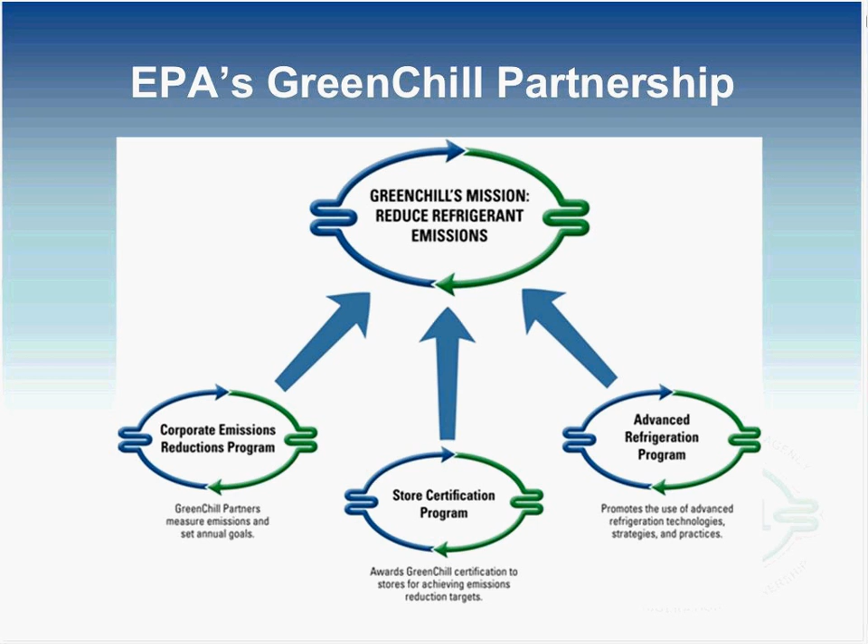What I'll be talking to you about today is the GreenChill leak reduction guide that we're putting together to help reduce refrigerant loss in supermarkets and to try to reduce and prevent leaks and repair them on a rapid basis. It's a guide that's going to be coming out shortly. It's not a cookie-cutter solution for any of the stores. We're going to cover everything on a broad basis.

Supermarket refrigerant leaks in a typical store now average 20 to 25%. GreenChill members have been able to reduce that leak rate in half, down to about 12.5%, and individual partners have been able to reduce it even further, down to under 8%. And partners with advanced refrigeration systems with best practices have been able to achieve rates on individual stores of 0 to 5%, which is remarkable.

The 8 categories that we picked that contribute to refrigerant leaks in supermarkets. Compressor racks are number 1 in most supermarkets, and these racks are generally purchased prefabricated from a major supermarket refrigeration manufacturer, and they have manifolds, receivers, valves, oil system, and controls factory installed to reduce field labor, and the hope is that it will also improve the installation quality. Leaks occur on the racks: a number of components and fittings located on a common frame within a confined space and subjected to the constant vibration from the compressors.

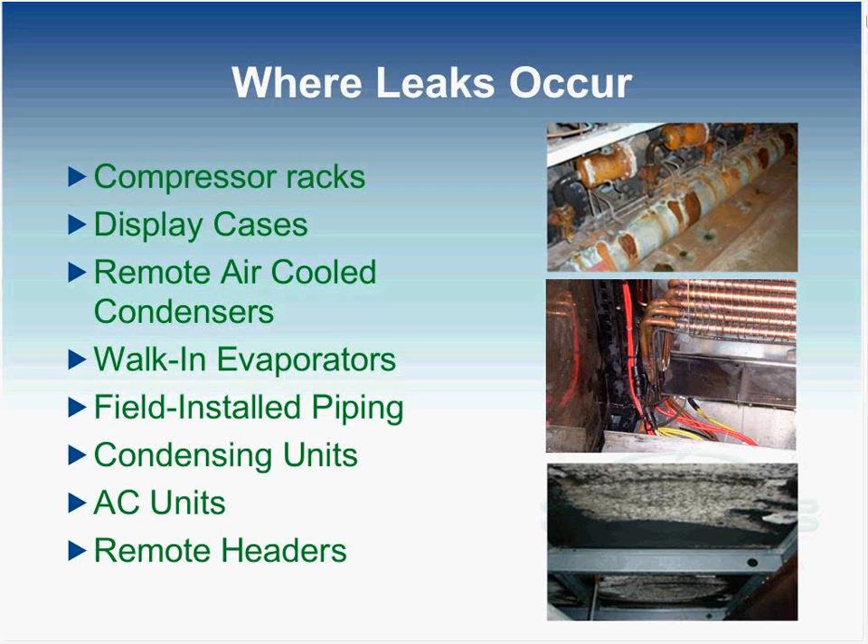Here are causes of leaks. Leaks occur in brazed joints from improper brazing techniques. This is due to improper cleaning of the joint prior to brazing, using the wrong brazing alloy, not heating the joint uniformly, or to the proper temperature, before filling it with brazing alloy. Leaks occur also on threaded and flared fittings when they're not tightened sufficiently, and of course they're also subject to loosening from vibration. At the other extreme, they also could crack as a result of being over-tightened.

Seals exposed to HCFC refrigerants swell at a different rate than seals exposed to HFC refrigerants, and if your system is being retrofitted from an HCFC to an HFC, the gaskets or seals in the system may need to be replaced.

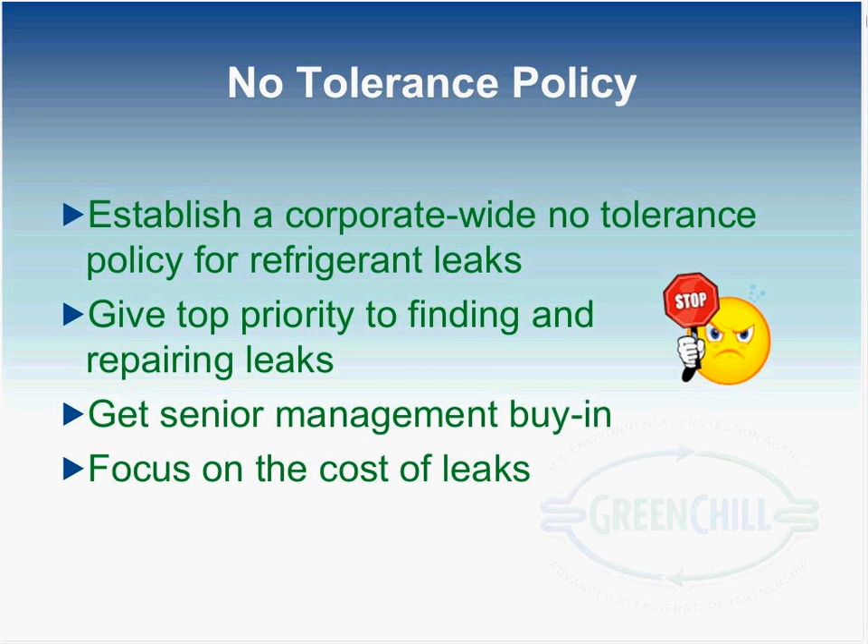Once the company has decided to make leak prevention a priority, the next step is to put a refrigerant management system in place in your stores and in your company. Leak tracking is an essential component of the refrigerant management system and of a program that you would have. Tracking systems enable companies to easily quantify leaks, isolate leak sources, and manage refrigerant leaks across multiple stores and systems. Refrigerant tracking also allows companies to benchmark their data against industry trends and set and meet reduction goals. Tracking systems enable companies to hold individual stores accountable for their leaks and make it possible to reward store employees, service technicians, or contractors for good practices.

While tracking systems can be useful, software-based systems are more efficient and proactive in tracking refrigerant leaks. Some programs currently available can track inventories, service dates, quantities, refrigerant types, system capacities, leak frequencies, and component failures. Software should be accessible by the service technician at store level, and each technician should be trained to input the information for every leak event, repair, refrigerant addition, or verification of the system. It should include the refrigeration system ID, the leak location, the type of failure, and the quantity and type of refrigerant added.

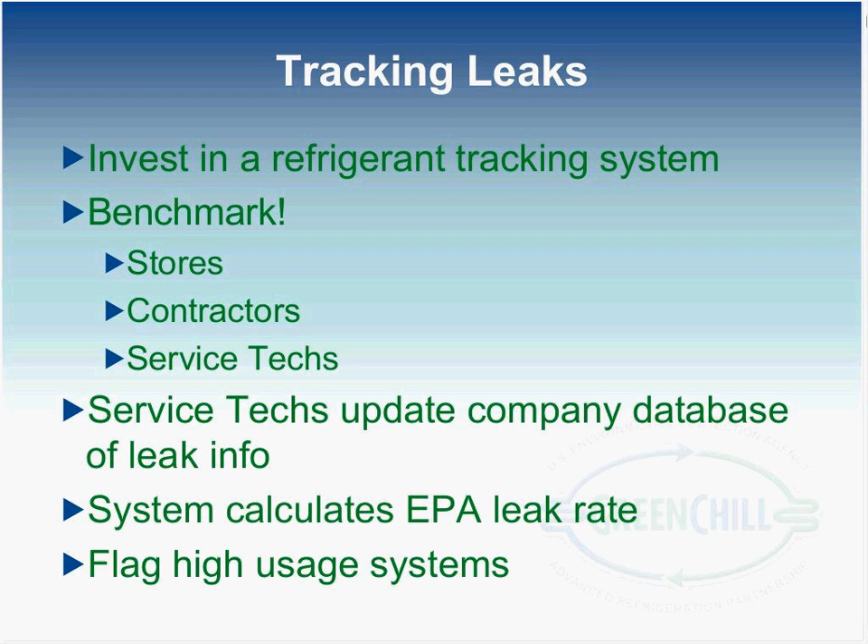Refrigeration racks, as well as the entire mechanical room, should be maintained to as clean a level as possible. Compressor racks and their components should be free of oil and dirt. Corrosion on steel components should be removed, and the components painted with a rust-inhibiting paint to prevent further corrosion. The room should not be permitted to be used as storage areas by store personnel.

Besides the obvious safety concerns, the clutter reduces the technician's productivity, adds to his frustration, and increases maintenance costs. As a result, equipment in mechanical rooms should be cleaned on an annual basis. Oils and other substantial messes should also be cleaned up as they occur.

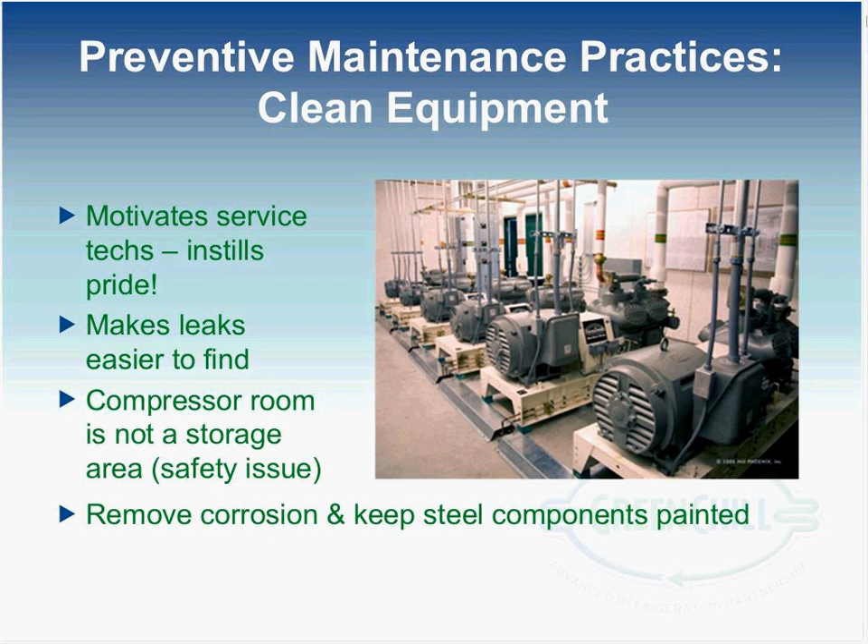Refrigerant leak monitoring and alarm systems allow us to respond to major leaks that could develop between regular leak inspections. Leak detection systems could be direct or indirect. A direct leak detection system measures the refrigerant leaking in an air sample near a refrigeration system or one of its components. An indirect system would measure changes in receiver refrigerant levels or the weight of the condenser receiver assembly, or a system temperature increase.

Often the first notification of a refrigerant leak in a store is a case temperature sensor that's creating a temperature alarm as the rack runs low on refrigerant. Based on that, you could actually create a low-cost alarm system that could be incorporated into most stores' energy management systems by using a temperature sensor that's located in the farthest system from the rack, which should be the one that would actually be affected by a low refrigerant charge.

The system could be programmed with an alarm temperature that's as close to set point as possible without incurring any nuisance alarms, and when this alarm's activated, it could be treated as a refrigerant leak alarm. The monitoring system you choose needs to be tied to an alarm system that proactively notifies store management of any leaks. A level of redundancy or checks into the alarm procedure should be in place to guarantee that the leaks are not ignored.

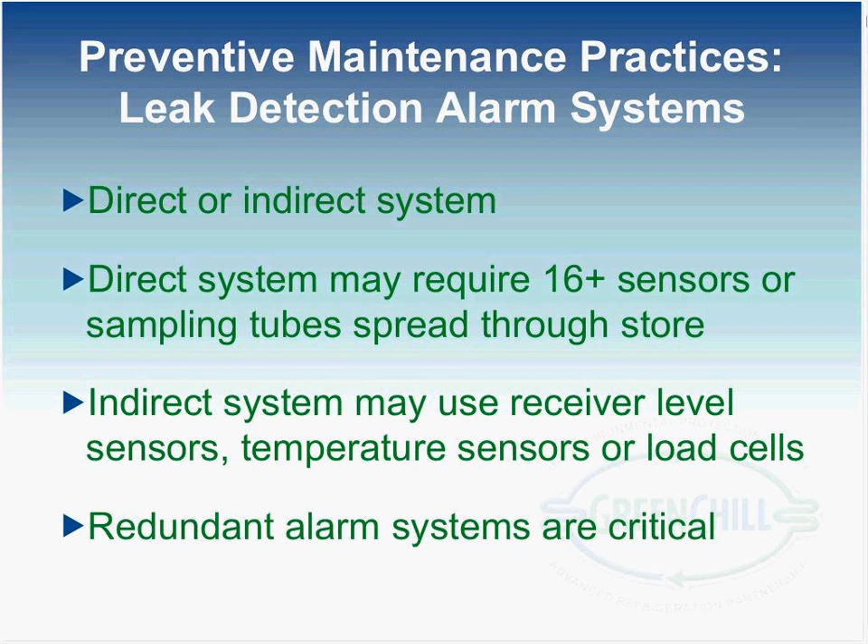Service technicians should check on a regular basis during PM to check receiver levels, compare receiver levels to data from the previous visit, and then do a walkthrough with a portable leak detector. In many cases, the first refrigerant leak found may not be the only leak in the system. And the first leak may not be responsible for most of that refrigerant loss.

It's important that each technician understands the correlation between the quantity of refrigerant charge lost and the leak rate of the leak found. If the leak found is too small to leak the quantity of refrigerant lost, the technician has to assume there is another leak in the system and continue on with the leak search. A check should be done every 1 to 2 months based on the size and type of the system. Large DX systems should be checked more frequently, while secondary systems with mechanical room monitoring may be checked less often.

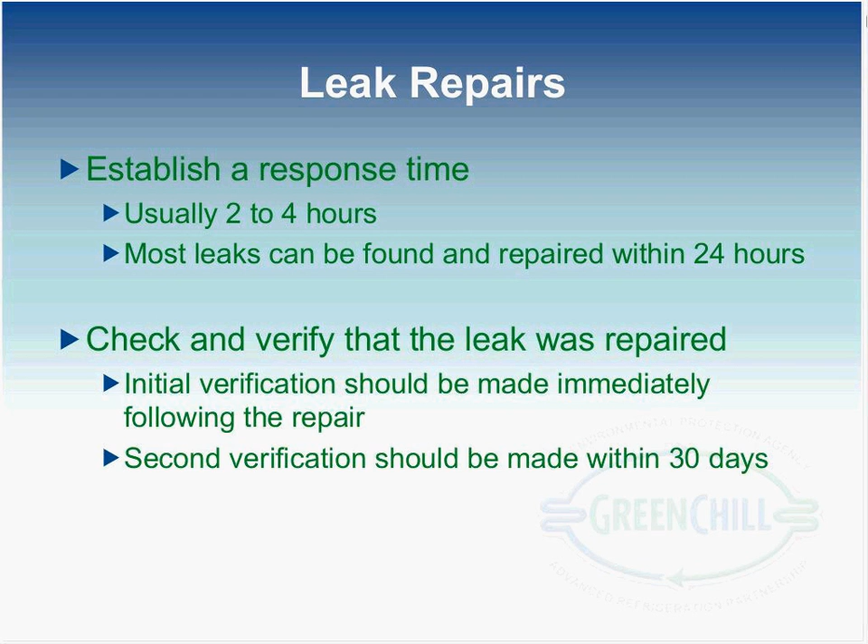A system may require more refrigerant in the winter to permit flooding of the condenser to maintain a minimum operating head pressure. It's known in the industry as a winter charge. This charge should be kept as small as possible using split condenser valves, fan cycling, and floating head pressure control. The total annual charge may only need to be used for a relatively few hours of the year, and the rest of the time it's stored in the system's receiver, and this results in a system that has an excess charge 90% of the time.

If a leak occurs during this 90% period, there's a potential of losing the entire winter charge before the refrigerant loss will begin to affect case temperatures. To minimize this, it's important to document the receiver levels using that GreenChill receiver level chart. These levels should be posted on the refrigeration rack or in some other convenient location readily available to any service tech.

Some components should be replaced with parts that are more leak resistant or have fewer potential leak sources. For example, a discharge piloted EPR valve could be replaced with a suction stepper valve, which eliminates the high control line, provides better temperature control, and is more reliable. Suction and liquid manifolds during a remodel could be replaced with loop piping systems or remote manifolds to reduce the number of fittings subject to rack vibration.

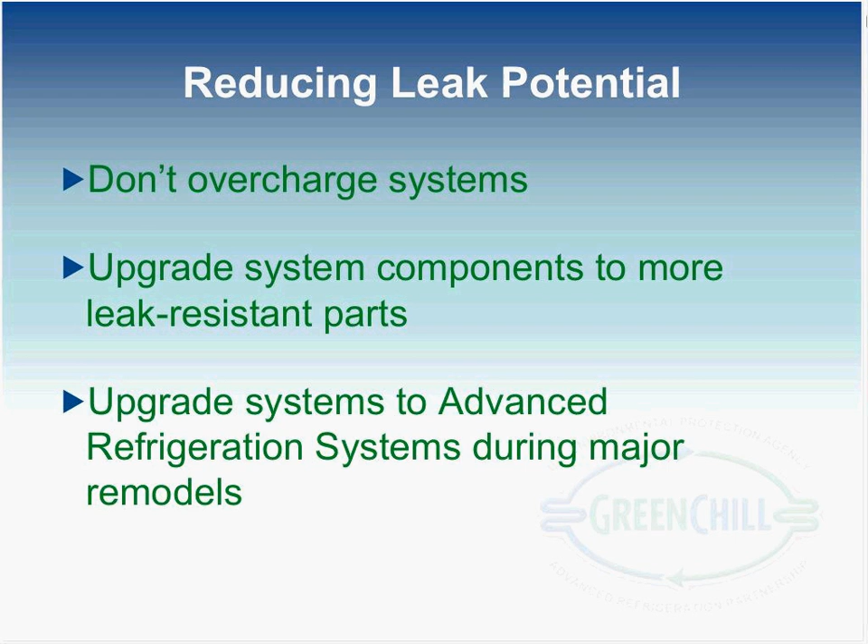Giant Eagle is a regionally based operator in western Pennsylvania, Ohio, West Virginia, and Maryland. We have 171 corporate stores, 158 convenience stores, and our stores generally range in size from 26,000 square feet to 126,000, which gives you an average of about 69,000. Currently, our store footprint is somewhere around the 90,000 square foot mark. We utilize a lot of different components and a lot of different system designs, but for the most part, it's rack systems.

With 171 corporate stores, we don't have a standard prototype. That seems to change every couple of years. We tend to replace or build 5 or 6 new stores a year. Much of our growth comes from acquisition stores. We've had 5 acquisitions in the last several months. The acquisition stores typically have leak rates higher than we'd like to see when we first take them over, and then as we make our changes, we see rates improve. Currently, we have 3 secondary stores in operation with a 4th one under construction.

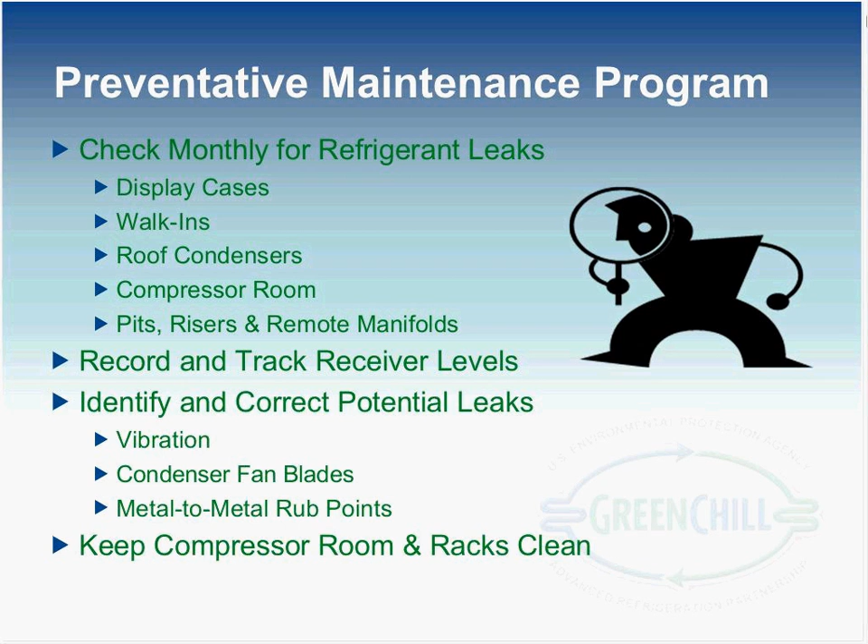Potential leaks are repaired when found. We don't allow them to become follow-up work or work to be performed during slow work periods. Another thing Cliff also mentioned was compressor room storage. We don't allow any compressor room storage. We've had instances where the equipment that gets in there does cause leaks.

The central infrared leak detector is installed in every store in the chain except the most recent acquisitions. The detector is connected to a web-based refrigerant tracking system and back to our refrigerant monitoring service, which continually checks the status of the detectors in all of our stores. The monitoring service sends an email notification to myself and to the refrigeration contractor involved. And for alarming critical level leaks, the service provider is dispatched via our call center. The state's refrigerant reporting program is also part of the EPA reporting requirements.

And as good as any leak detection system is, it's not able to monitor every area of the store, so we still have to rely on good preventative maintenance programs. There's the monthly leak checking of display cases, outside units, as well as monitoring of the receiver levels. We've been developing a dashboard that encompasses more than the leaks. It encompasses our refrigerant leaks, our rack energy, and service call and maintenance volume that is issued through our work order system.

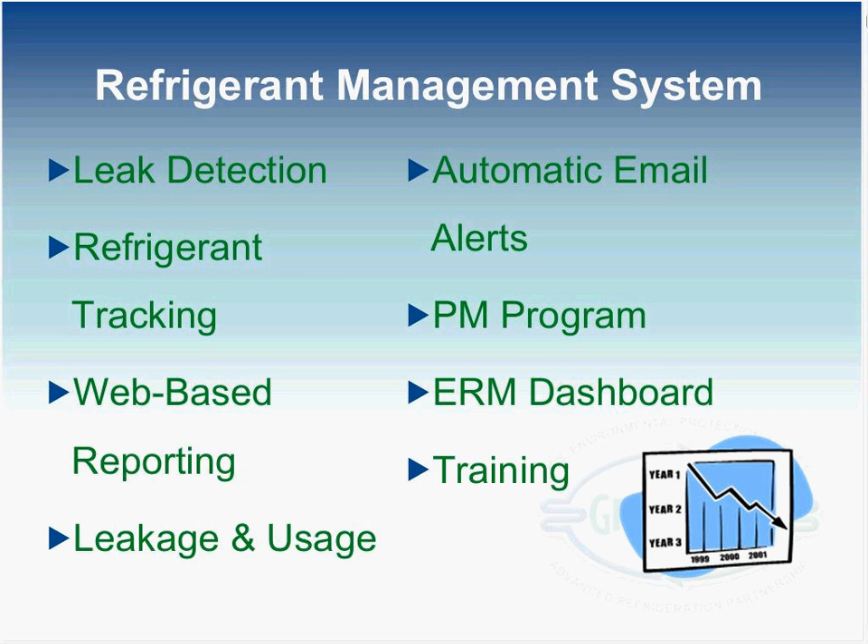Everybody knows these tools are only as good as the technicians are trained to use them. We do ongoing training with the technicians, and also with folks in Giant Eagle that utilize this system to help us manage and track what's going on. If any of our leak rates at any service organization exceed our target goals, we provide retraining or partner with them to see what may be the issue so that we can continue to drive the leak rate down.

The leak testing system we use has very low maintenance costs other than replacing components that age. The consistent sensitivity is maintained by a yearly calibration. That's part of our maintenance tasks. They have to calibrate it yearly. There's a kit available for that. Each channel can be refrigerant specific so that we can monitor different areas of the stores. Our alarm levels are based on what we need, and currently our level is at 50 parts per million.

We haven't noticed any false alarms. While you get them every now and then, it's based on some stuff that they use in the store, but we've pretty much eliminated that now based on where we put the sample points. Our sample points are between 8 and 16 points in every store, depending on the size of the store, and the system notifies us when a monitor goes offline.

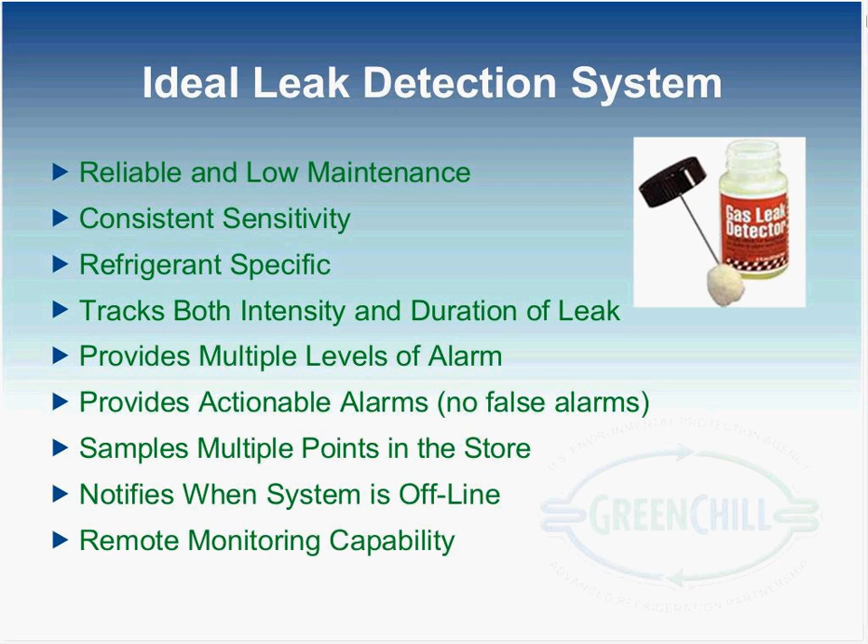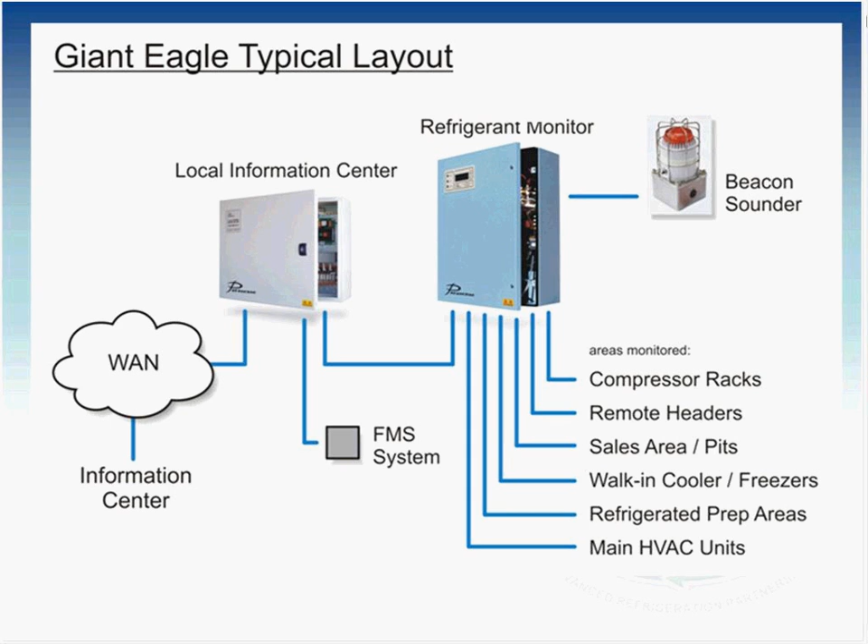The dashboard in here is available to all of our service providers. They see this when they first log in, but they are only able to see their contracted sites. They don't have visibility into anybody else's sites. Our refrigerant management system leak detection is all based on data collection, and monthly leak checking, and the utilization of that data for repair versus replace.

We basically have a traffic light system so that we know that green, yellow, and red indicate where we're getting into problem areas, and the contractors have found that very easy, very focused on what they need to do so they don't waste time in areas that they don't really need to be looking, even though it gives them some insight for their overall picture.

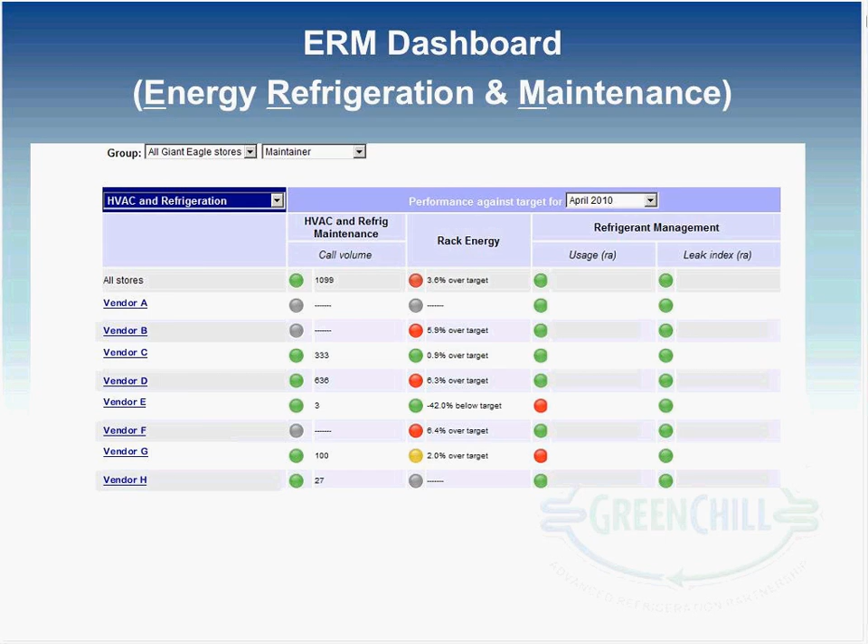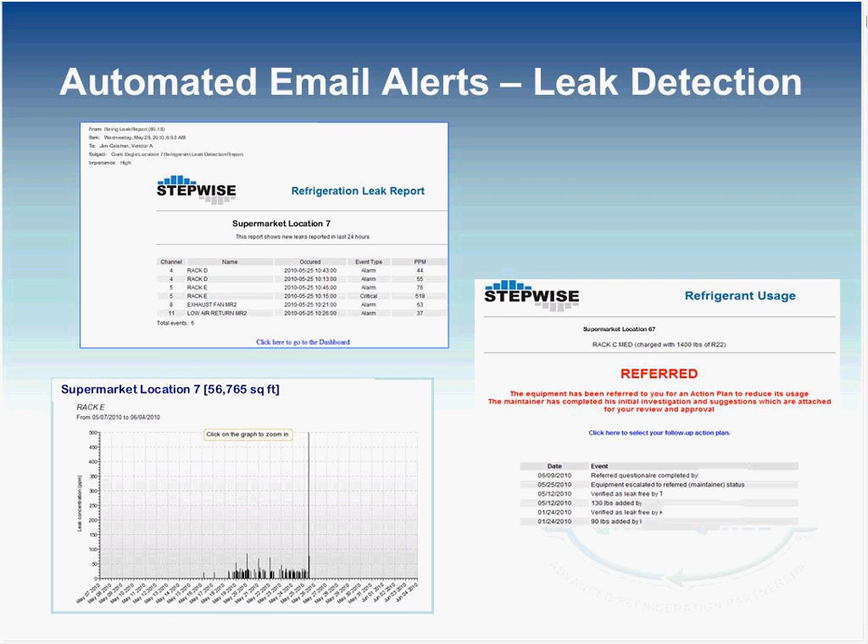This is out of what you see, the email alerts, the Stepwise Refrigeration Leak Report, along with the graph that shows the leaks that are happening in the store. Our threshold is at 50, so most of those are smaller leaks, but it's an indication that there was obviously a larger problem coming. When the system's defined set of criteria is met, an alert, like you see there on the status, comes to myself, and we start looking at what's causing the issues, if it's the aged equipment, and that gives us some research items that we can go back on.

The technician shows up at the store after he has an event, and he goes in there and puts refrigerant in there. He goes into the system, or can go into the system, and use this tracking record. He answers a few questions. The leak location, the cause and action are all on the screen. We tried to make it simple, so we limited the choices to 6 to 12 choices for each category, and we eliminated the choice called other because we didn't want it to become a dumping ground, so we could target where we needed to go.

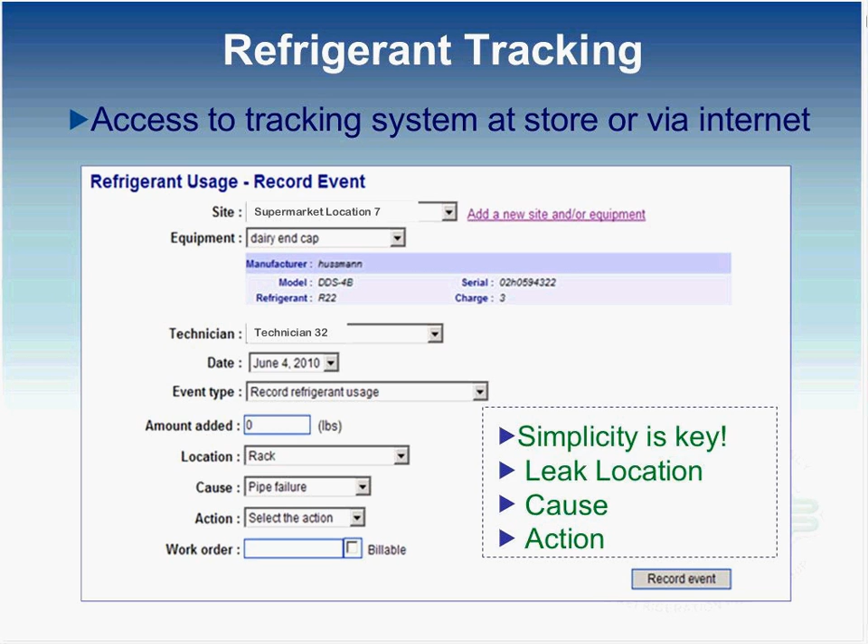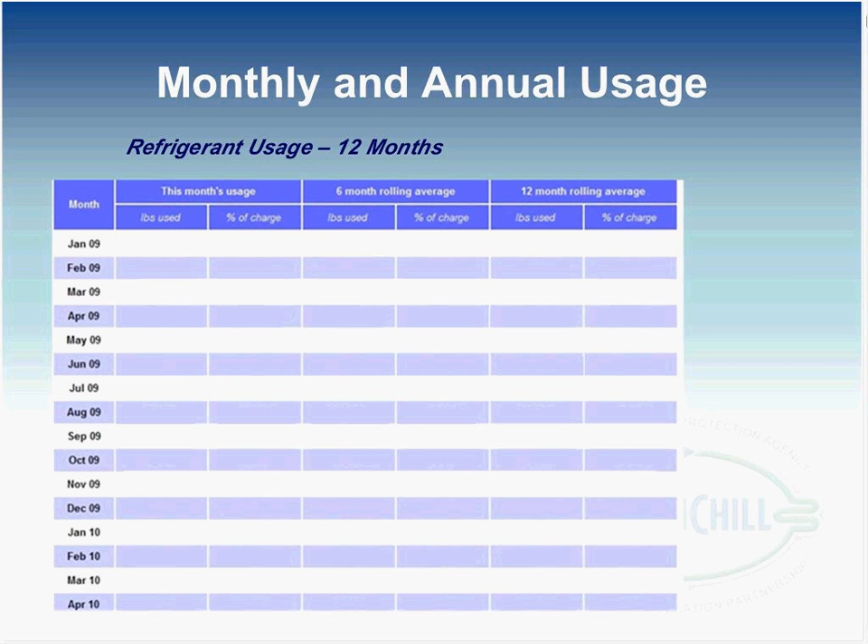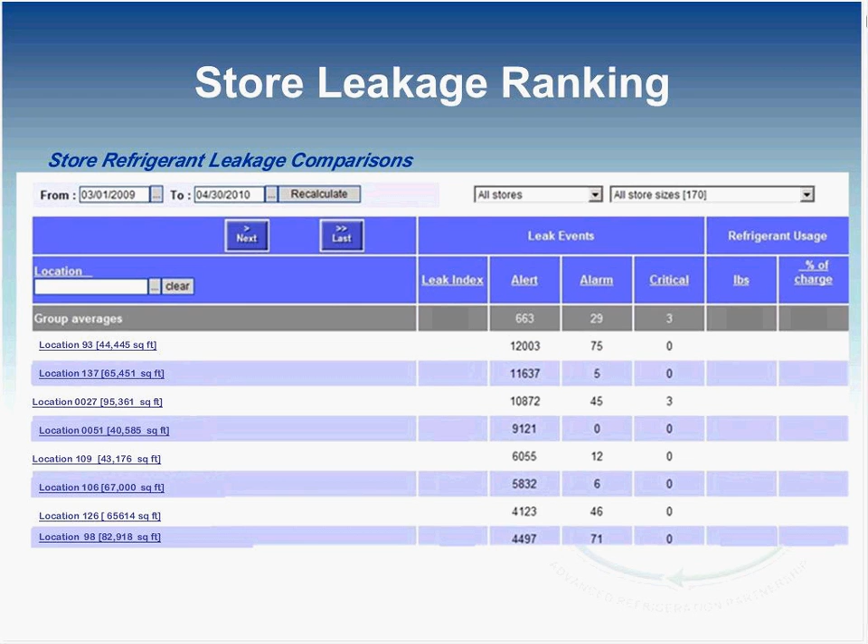This is another screen. This is store leak ranking. We can sort this by the store from bad to worst, or the best stores in the chain, and compare how old they are, the types of equipment, and again, it's all in the vein of reducing leaks, reducing costs, and hopefully replacing equipment that's aging or is no longer viable.

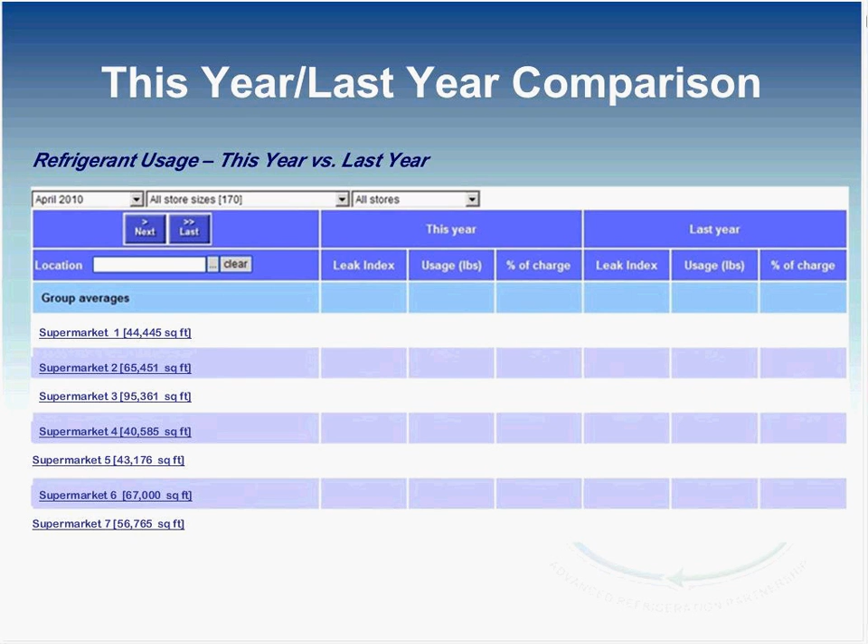This brings us an opportunity to compare ourselves, each store, this year versus last year. We could also do it by contractor, but typically it's store against store, and it allows us to view trends and where we're going, if we're getting better, if we're getting worse, and again, it's all data to drive improvement.

Air sampling tubes located in the kick plate area of case lineups detect the presence of refrigerant from a leaking case, but a technician still needs to pinpoint the leak by using his handheld, going through the case, whether it's opening doors or produce cases, and just targeting the specific location. Eliminate the 2% leak rate of the roof condensers and the 2% of the AC equipment. The majority of the remaining leaks should be picked up by the refrigerant monitor. Nothing's perfect, and it doesn't always happen, but for the most part it should.

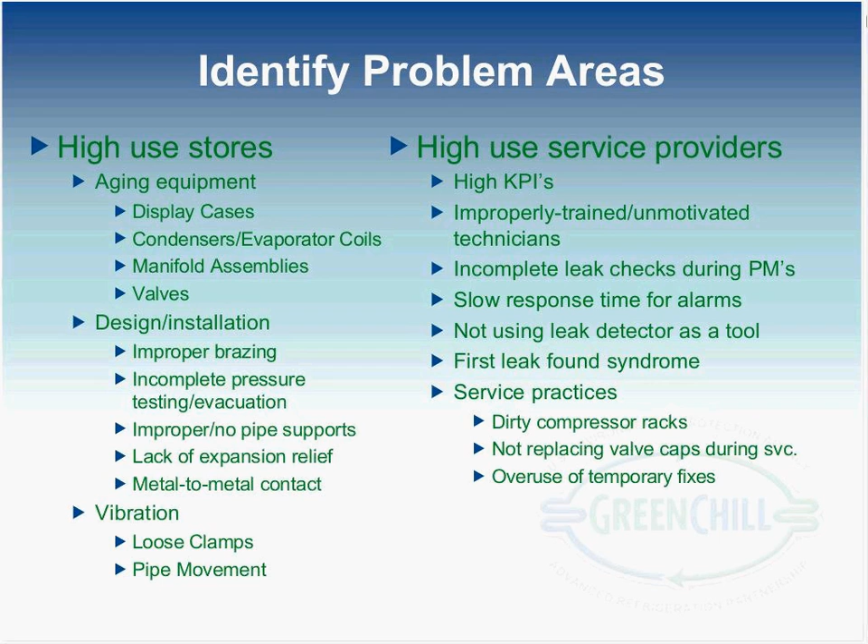The high use service providers, we use KPIs, key performance indicators. This helps us train and learn from what we're doing to improve, and it also helps us lower our costs, and at the same time it helps the contractors lower their costs for their preventive maintenance contracts. What we see on some of these is incomplete checks, slow response times, and that just increases our cost and increases our carbon footprint as well. So the first leak found syndrome that Cliff mentioned is also a problem, but as we train and go through this, we've reduced that greatly.

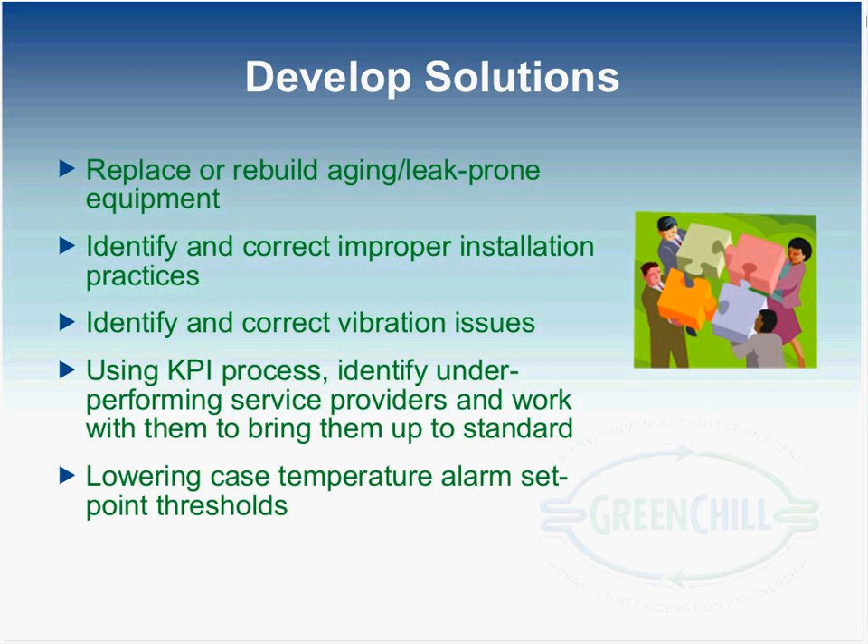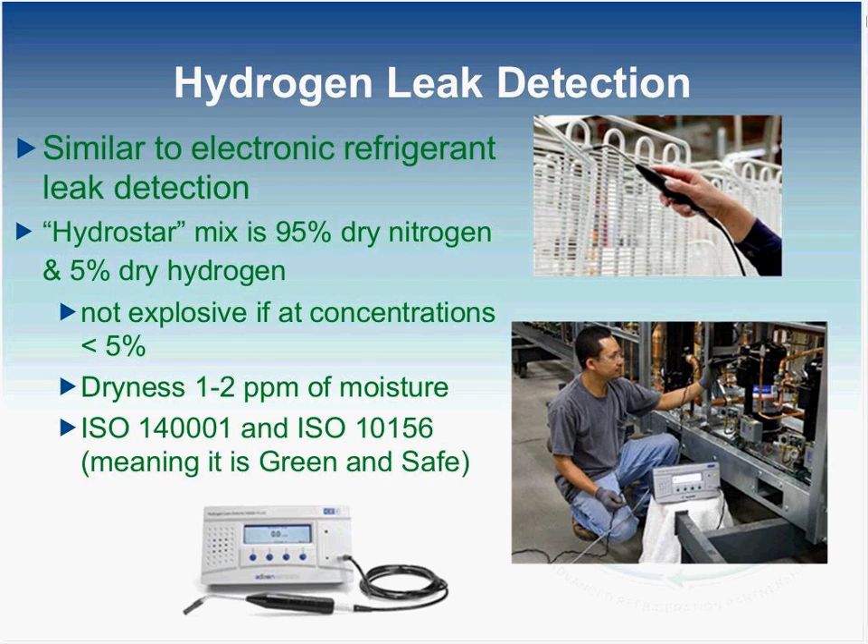The gas used to put hydrogen in the system is a purchased gas that is HydroStar. It's 95% nitrogen and 5% hydrogen. The part per million is 1 to 2 parts per million. In concentrations of 5% or less, it's not explosive. It's very green, very safe. It meets ISO 14001 and 10156. So a good gas to use there.

When you use hydrogen as a tracer gas versus what's standard, it uses a current electronic handheld leak detector to do the gas detection. A standard detector will pick up about a 2 ounce per year leak on a 404 tracer gas with a 5% concentration at 100 pounds. Concentration of 404A on a fully operating system is 100%. About the best it can find is a half an ounce per year, and that's typical of handheld electronic detectors.

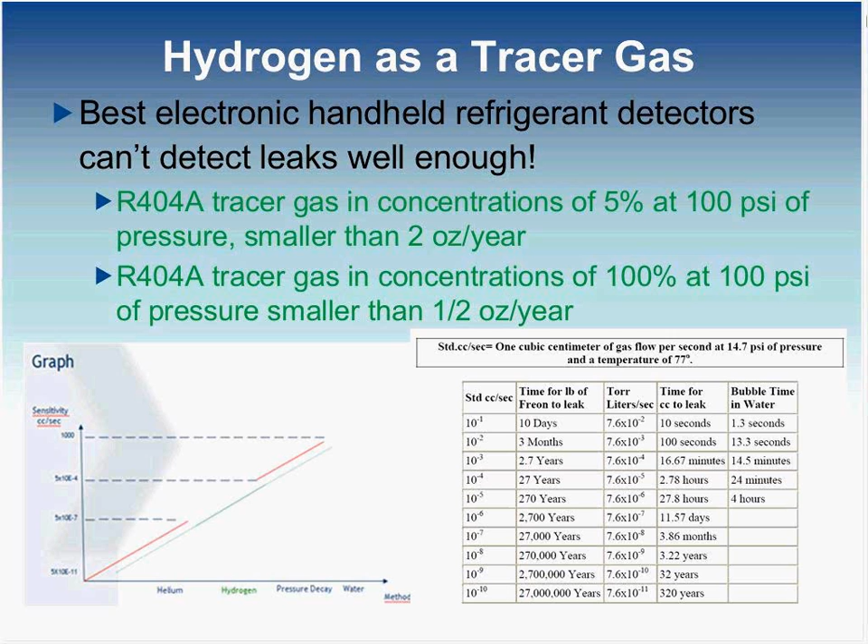The equipment can cost anywhere from $5,000 to $15,000 a unit, and that's in comparison to a $300 handheld electronic leak detector. The other thing you need, of course, is the hydrogen gas, which runs about twice the cost of dry nitrogen. And when you conduct the tests, the process is essentially the same. The difference I see is when you have this expensive equipment on job sites, you do have a risk of damaging a $15,000 tool, someone dropping it or stealing it. So you figure that in there.

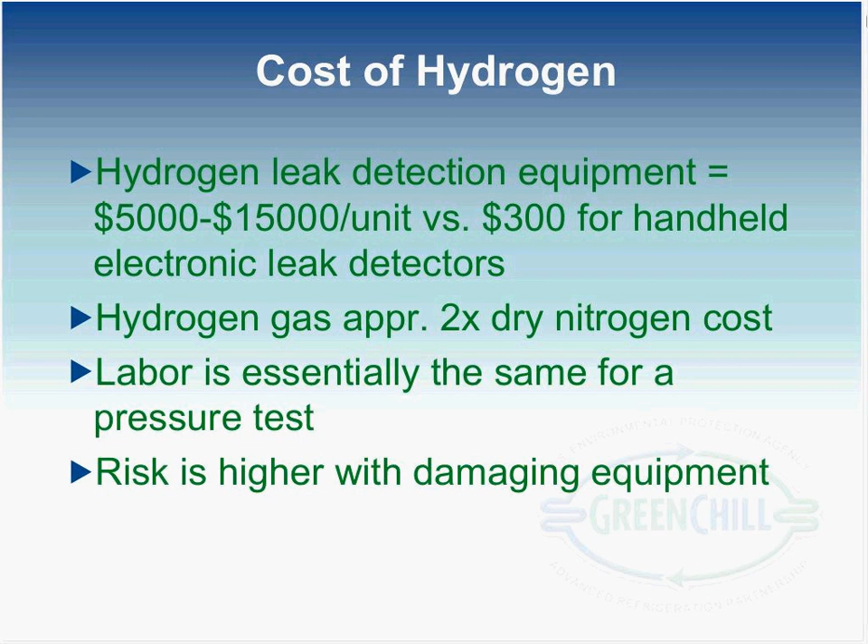It worked very well. Our first test site, we tried this on an entire store. We tested the store to 300 pounds of pressure with nitrogen and let that hold for 6 hours. We did not see 1 pound of pressure drop on that system. I intended to do 300 pounds of pressure with the HydroStar but didn't order enough, so we were only able to get the system to 125 pounds of pressure. But we still went through that entire supermarket, found 8 small leaks, and those leaks were repaired.

One of the leaks was kind of deceiving in that when we found the leak, it looked so large that I didn't believe the people had conducted the test properly. So I had them repressurize, and it went back with the standard nitrogen refrigerant and the soap bubble test. We could not find the bubble, but with the HydroStar, it just bubbled up to the point that you couldn't believe a leak was missed.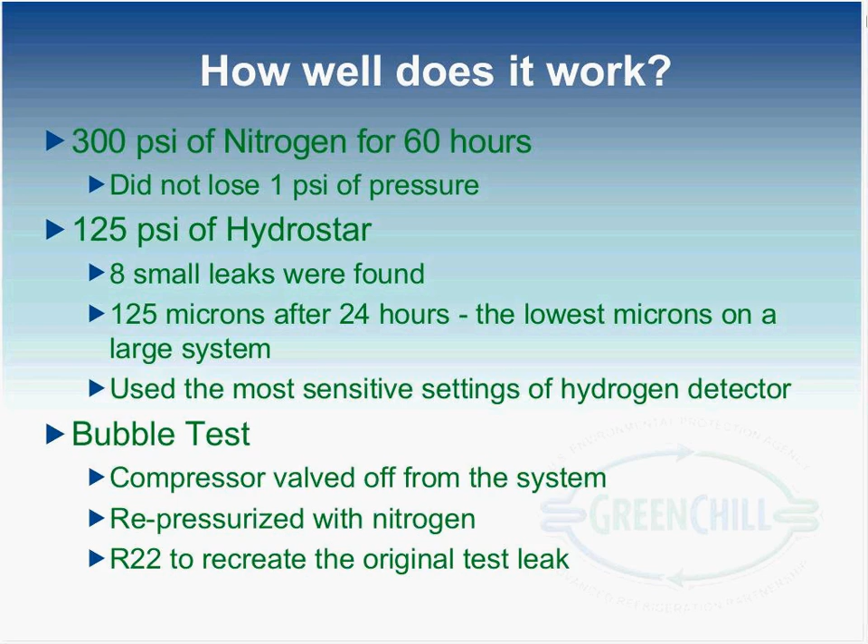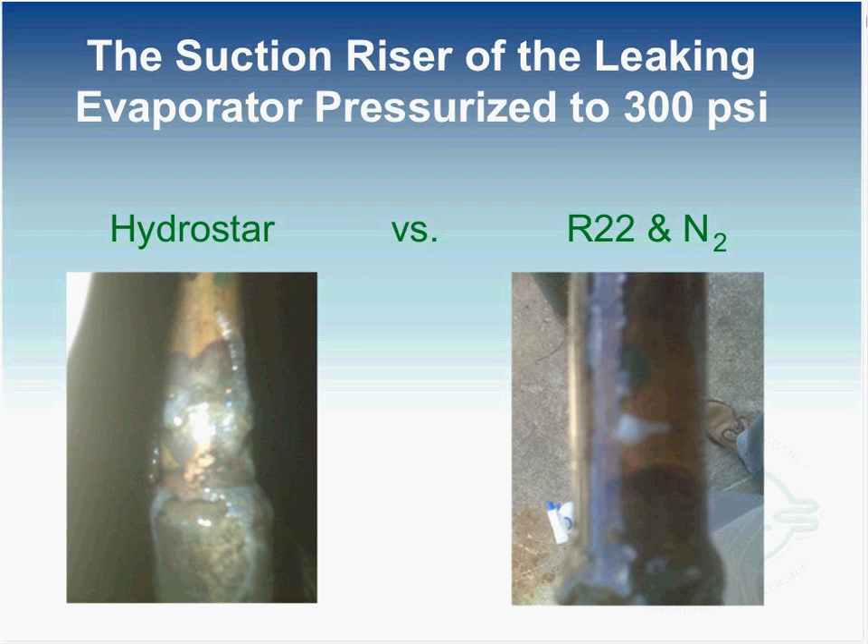This is not that leak, but a similar leak. This was a suction riser here. On the left, pressurized to 300 pounds, you'll see HydroStar bubbling out from where my arrow is and streaming down the pipe in a vertical direction. The leak at 300 pounds of pressure with R22 nitrogen is a little area here, and that's as large as it gets, and it remains there, with no apparent motion at all, and you can see the size of the bubbles with a more zoomed in picture, just much more difficult to locate.

Using this system in other areas, we've done tests on case lineups and things like that, gone in the day before, and you cannot find a leak in the system before we were going to install the cases. The cases remaining in the lineup were checked the day before with standard procedures with electronic leak detectors, and when the cases were out, we found leaks in the cases we weren't changing with the hydrogen test immediately.

To date, anything that we've tested has not had a leak due to the testing, and we've consistently been able to get any of these systems down below 100 microns.

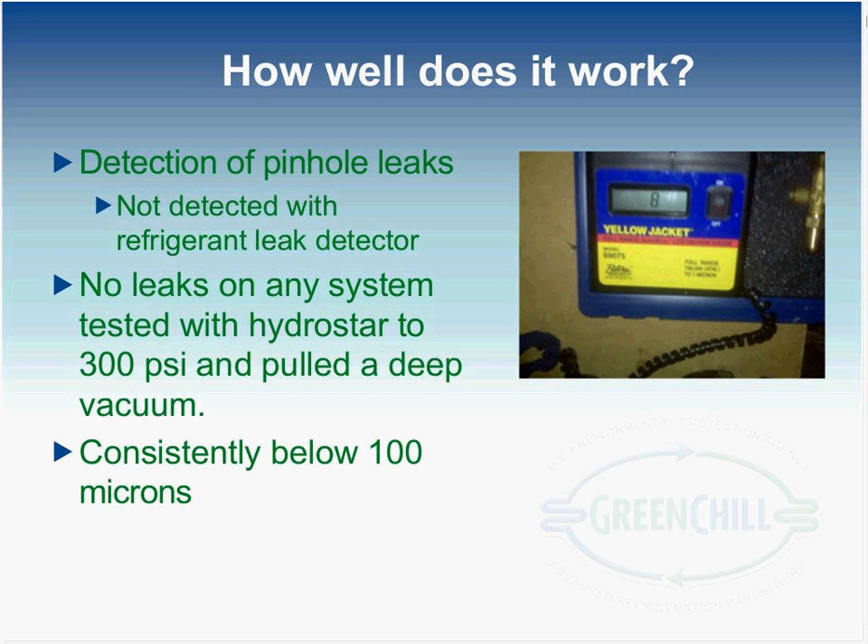Stores that have had problems: we have done 4 stores now. When I say full stores, I mean the whole system in the store was tested. The first we did closed after 7 months. There were no leaks. The second one we have done has been open maybe a year and a half, and the only leak we have had at that store was when we just changed the heat reclaim tank. The actual work they just did had a small leak. No gas was added, but it was a miscommunication.

The third store that we have done, there have been 2 leaks. Neither one of them were ones the hydrogen couldn't find. One of them was a service problem where somebody adjusted a superheat and didn't put the service cap back on the TXV. The second one was, I forgot the term, but ice formed in a pocket in a solder joint and busted the line as it swelled. So it was a tight joint at the time of installation. That ice expanded, contracted, and eventually burst the pipe, but unrelated, in my opinion and the manufacturer's opinion, to the

initial test. The fourth had a leak at a tie-in joint, so we tested the system, and the solder joints we tied it into had a leak there, and then there was one section that was untested that had a leak, but everything else, very, very tight systems. There's been about 2 years' worth of installations for us.

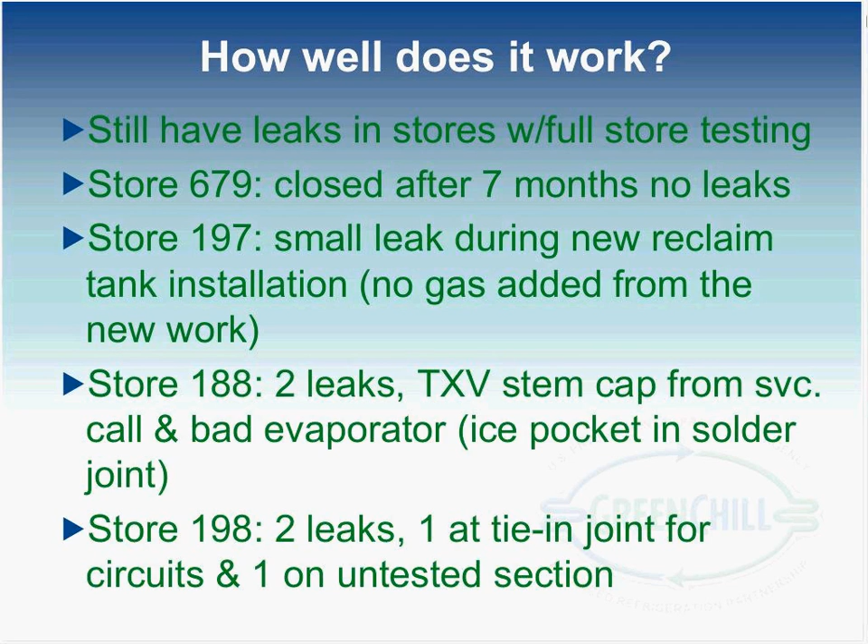Having that work and trying to improve the system, we went and took a closed store and did testing on a laboratory type system, an old system in the old building, where we set out to do repairs and testing to make a super tight system and learn things about vacuums and dispel some myths. What I always had heard is you could oversize a pump, and the other one was that you can't pull a good vacuum with oil present.

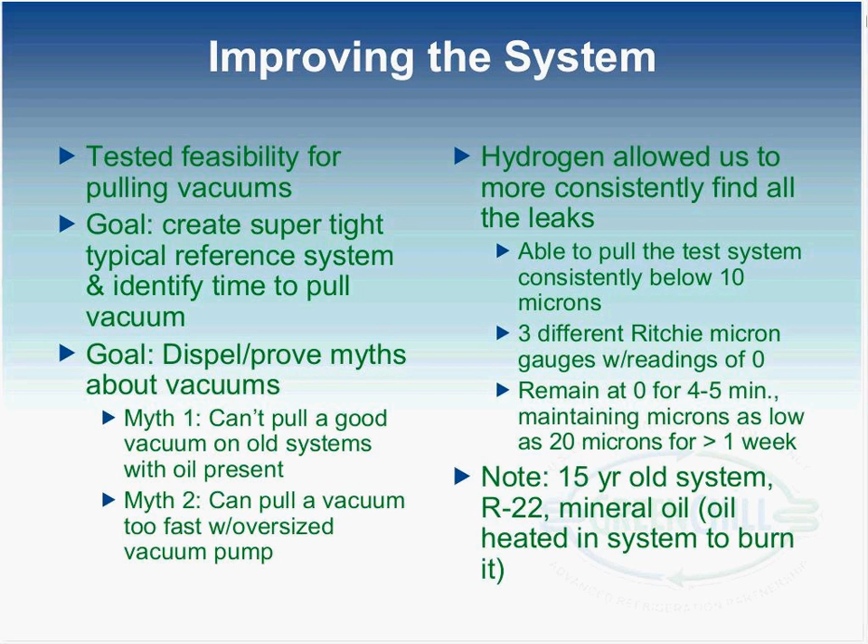The testing was done for about 10 weeks, multiple tests, and the hydrogen allowed us to find leaks. We were able to get that test system down below 10 microns. With different micron gauges, we were able to get to readings of 0 for 4 to 5 minutes, and we could hold 20 microns for a period of over a week on a 15-year-old system with oil in it, and we actually heated the oil in the system to prove that we could still get the deep microns with oil in the system, the way we're pulling vacuums.

That brought us around to a way to pull vacuums. We call it dynamic flow. We've made a manifold for pulling vacuum on the system. Start out with an installation. We bring the vacuum pump with this dynamic flow manifold. We test the pump, the oil, the micron gauges, and the manifold at the start, before tying it into the system. Then we pressurize the system and the manifold.

We then use the HydroStar hydrogen leak testing equipment to test for leaks on the entire system. We pressure test and do a dynamic flow. We pull vacuum on the suction side and introduce the HydroStar in the liquid line while we're breaking our vacuums. And repeat this purge, if you want to call it, until a vacuum is achieved.

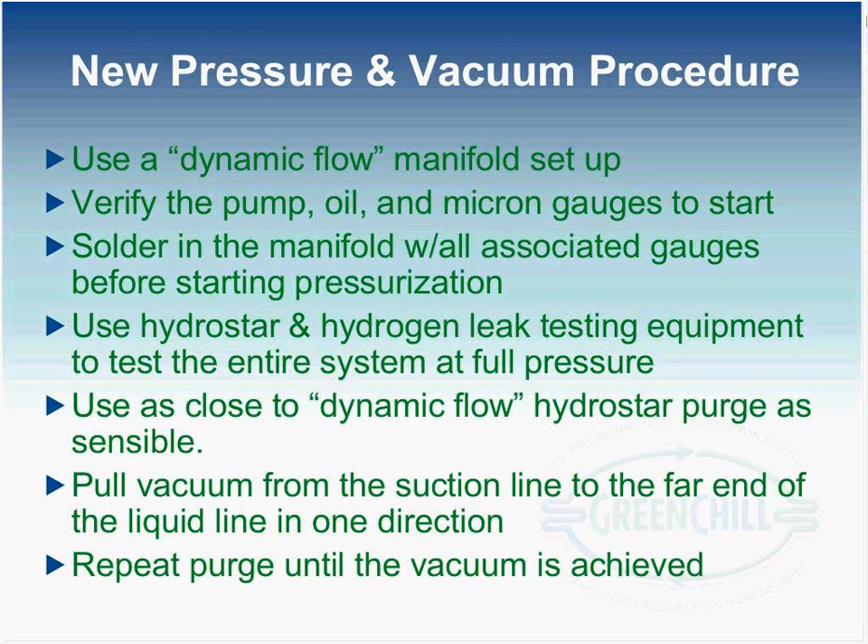So breaking it down just a little bit, we always try to start with a great pump. We make sure the pump can achieve a vacuum of 50 microns or better at the beginning of the test. If you can't get the pump to 50 microns, you need to get a different pump, in my opinion.

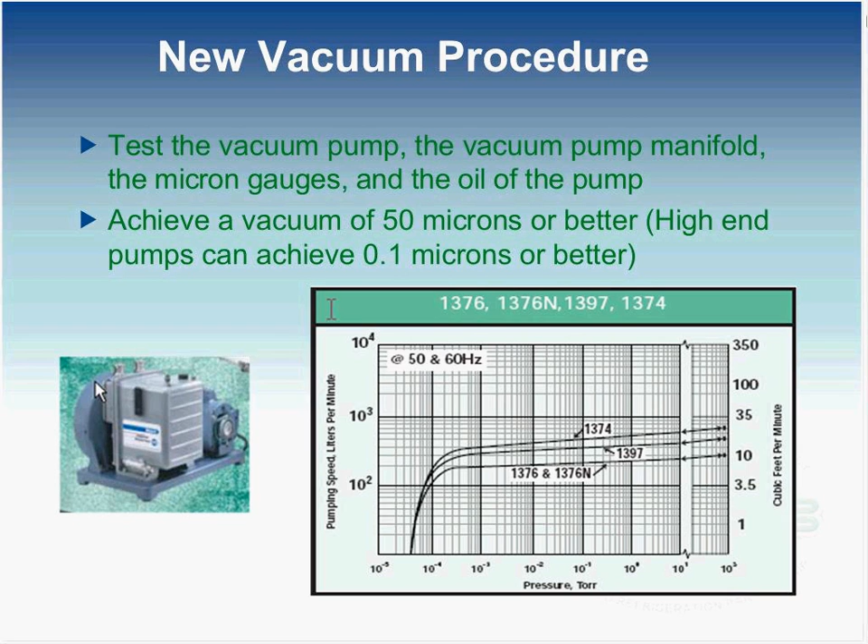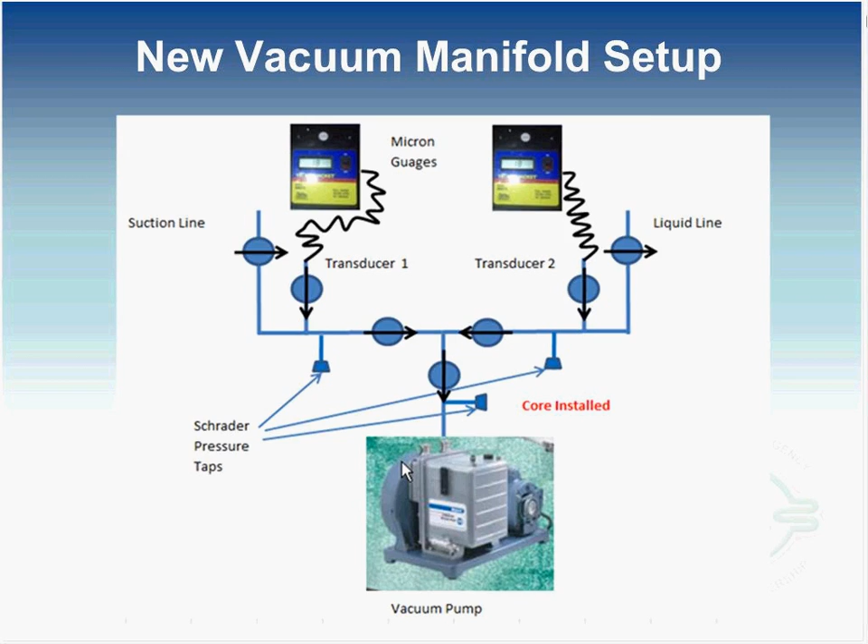After we've tested this, we then solder it into the system. We make sure we remove the valve core right next to the pump so that you cannot pressurize the pump. And then we shut the ball valves to the micron gauges so you can't damage your micron gauges. The system is then filled with 300 pounds of pressure for our systems, but whatever your max pressure is. On your pressure test, go over everything with this hydrogen tester.

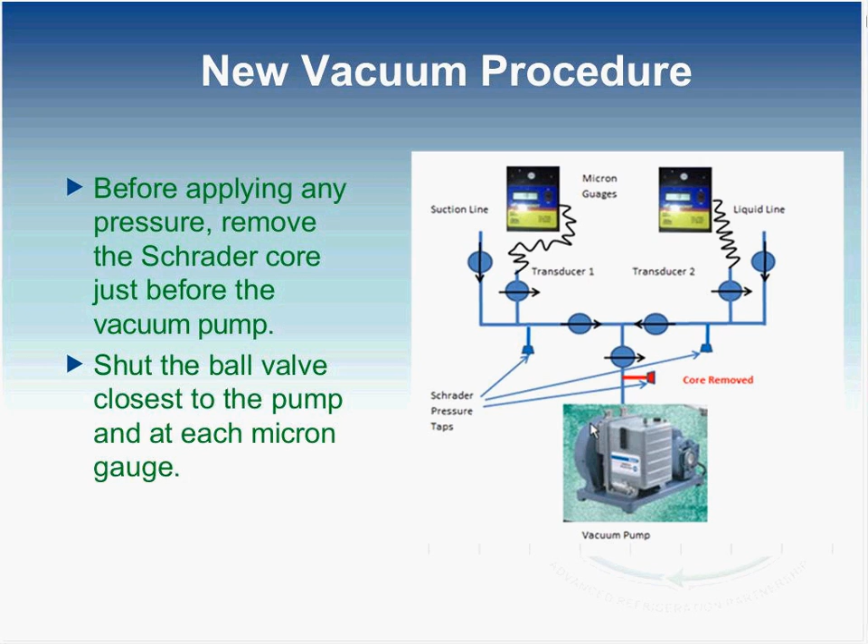There's kind of schematically the HydroStar connected to the system, and the arrows follow the way the gas flows throughout a standard circuit. It would be similar for an entire rack. We've got the ball valve closed to keep the pump separate from the liquid side here, and have the ball valve just above the pump shut.

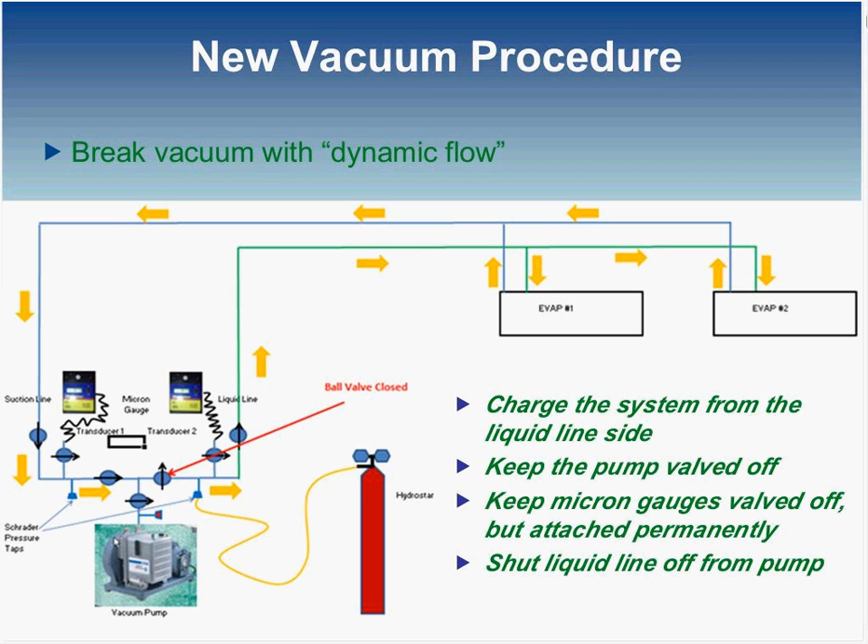We're charging from the liquid line. We're keeping the pump valved off. We're keeping the gauges valved off, and it just holds while we leak check. When the test is done, we always do it for a minimum of an hour. Micron gauges should read low microns because you've had them off when you've done your initial test.

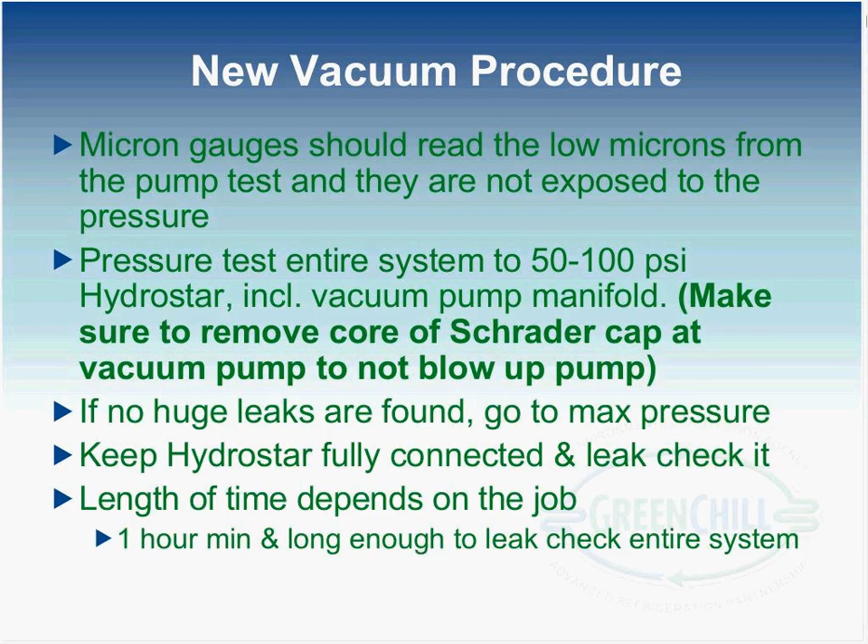We generally start the pressure test, let it hold 50 to 100 pounds for a little bit to make sure it holds tight, then go to max pressure. We keep the HydroStar connected for the entire pressure test and the flow portion of the vacuum test. We'll hold the pressure for a minimum of an hour, and once it's held for an hour and we've tested everything, we'll crack the ball valve next to the pump and relieve the pressure with the Schrader core that's open.

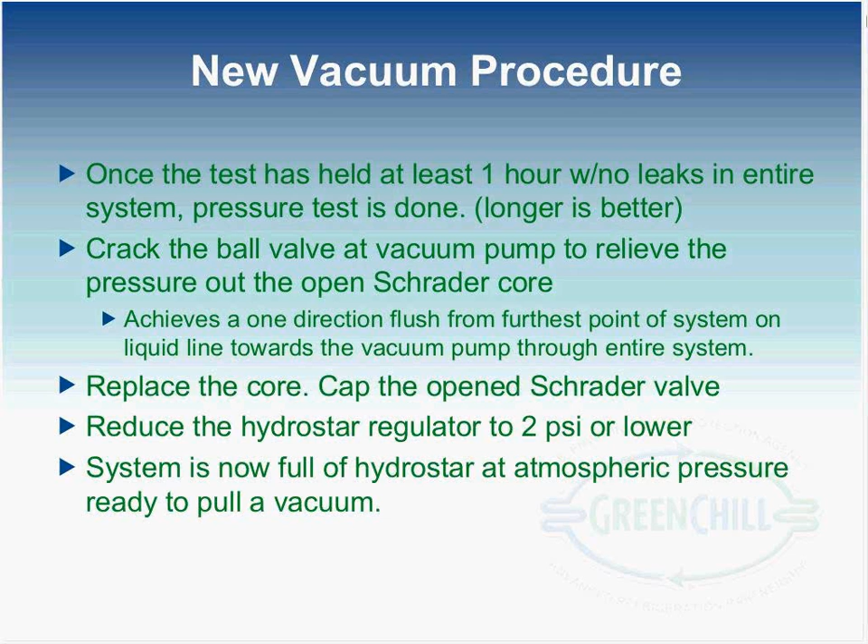We bring the system down to atmosphere. We close the core and cap the Schrader valve. We reduce the HydroStar regulator pressure to 2 pounds or less, 0 to 2 pounds. The system is sitting at atmosphere and ready to pull a vacuum. At that point, we'll keep the ball valve on the liquid side of the pump closed and open the ball valve to the pump, turn the pump on, and start pulling our vacuum.

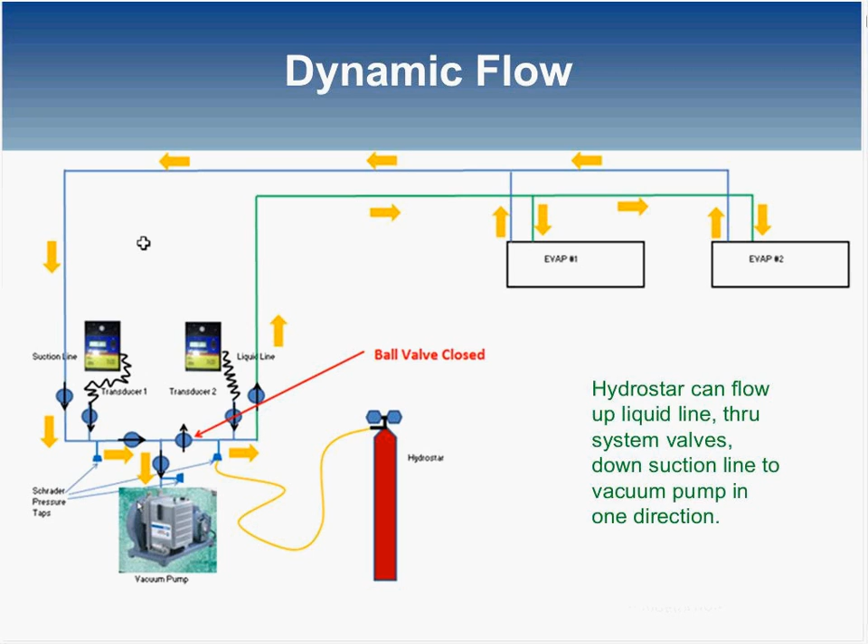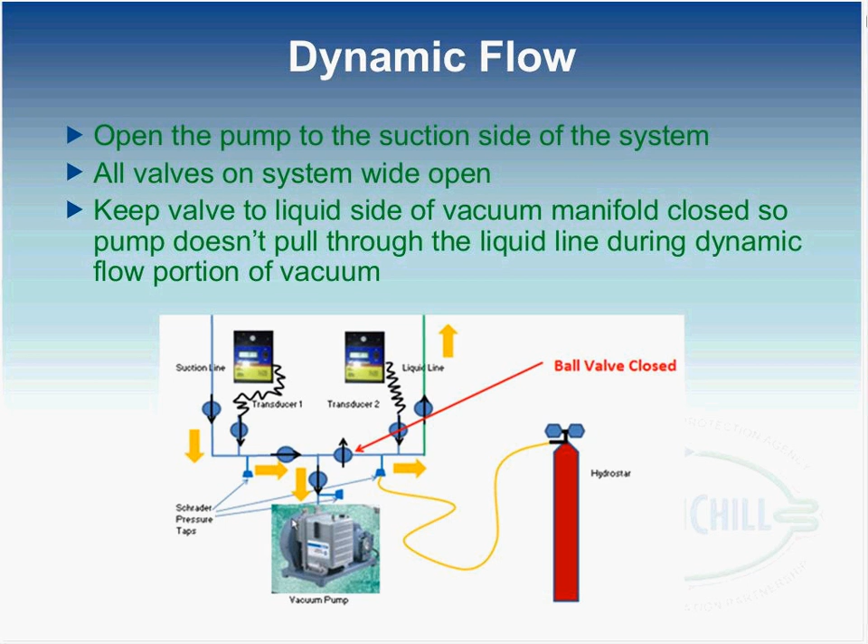HydroStar can flow from the far liquid all the way through the system, and your transducers to your micron gauges. And let's see, I'm getting a little lost in my slides here. You just want a vacuum at this point. It should pull down rapidly near the pump to 1,000 microns, and the one near the HydroStar should be something around 5,000 microns. If it's higher than that, that's okay. The point is the one closest to the pump should be around 1,000.

You can crack the HydroStar bottle, and what you're wanting to see is the gauge on the liquid side go to 80,000 microns, so you know you've got some flow through there, and you'll see that the vacuum at the pump will rise to about 5,000 microns. Let it run about 60 seconds, and you'll see it come back down to 1,000 microns or so. We're typically doing that about 5 times. If you want to try a little more, that's fine.

But the point is you push gas through it, and it's a very dry gas. It's imparting energy into the system. That energy releases the moisture off the sidewalls of the pipe and flushes it towards the vacuum pump, without breaking vacuum all the way to atmospheric pressure, which would put a tremendous amount of molecules in there and waste your time pulling it back down to a low micron. So this greatly speeds up a vacuum. Once you've purged what you're comfortable with, I would say 5 or more times,

you're going to disconnect the HydroStar from the system with the HydroStar flowing so that you engulf that Schrader with dry gas as you put the cap on it. Once it's capped, you're going to pull down as low as we can. We're constantly below 50 microns. Cycling the solenoids and turning all the valves if possible while you're in a deep vacuum can speed up things a little bit.

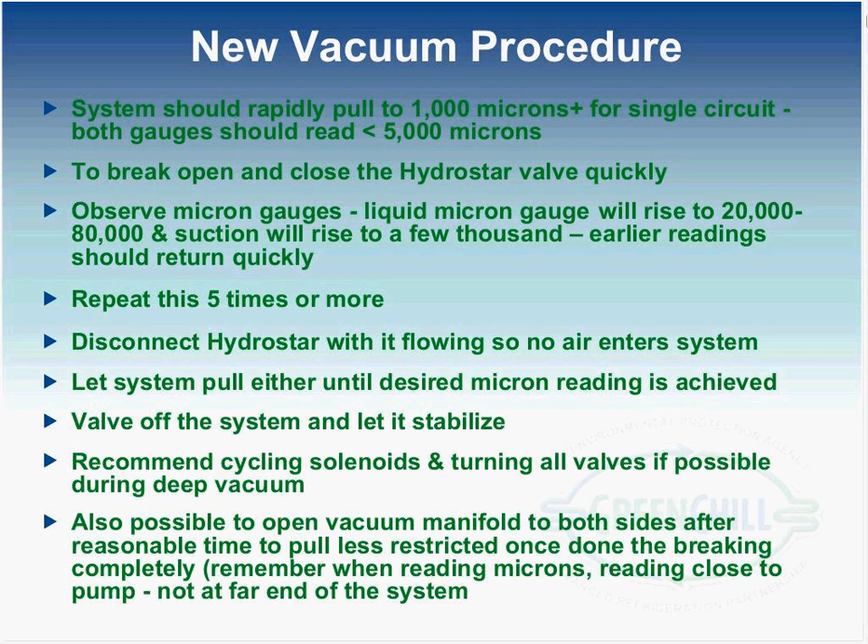Sure. The problem with that receiver graph is that you have to have the system in basically the same condition every time you check the level. In other words, it should not be in flooded mode where the refrigerant is logged up in the condenser. It should not be in gas defrost. The heat recovery should not be on. And even with that, there's probably some fluctuation in it. But the trick is to get the system at the same condition every time that you measure it. And that's probably easier said than done.

Okay. Is something special needed to bring it to that same condition, or do you kind of wait, or how does that work? You probably have to do it. If it's a cold winter day, it's probably not the best time to measure it. You maybe have to wait for a warm day, or be able to lower the pressure temporarily to get refrigerant back out of the condenser into the receiver.

Like I said, it's a little easier said than done. But it's a tool, and it is a good tracking tool to be able to check from one month to the next what your receiver levels are. It's not perfect, but it's better than doing nothing. Mm-hmm. Jim or John, do you have anything to add to that?

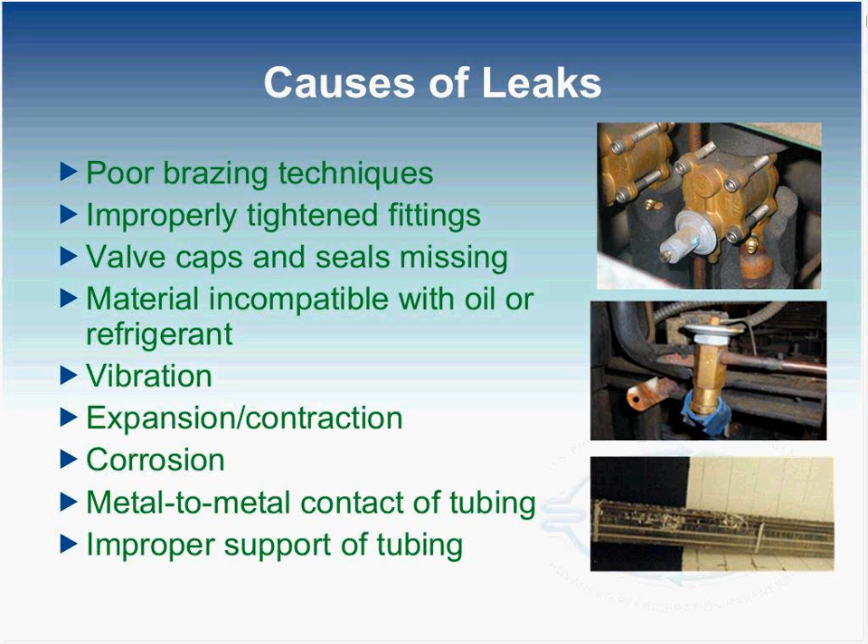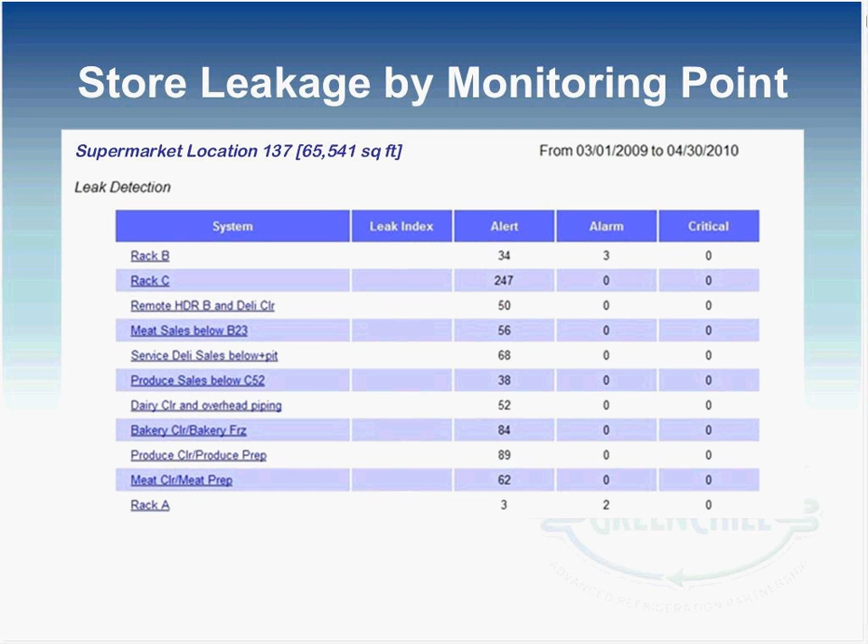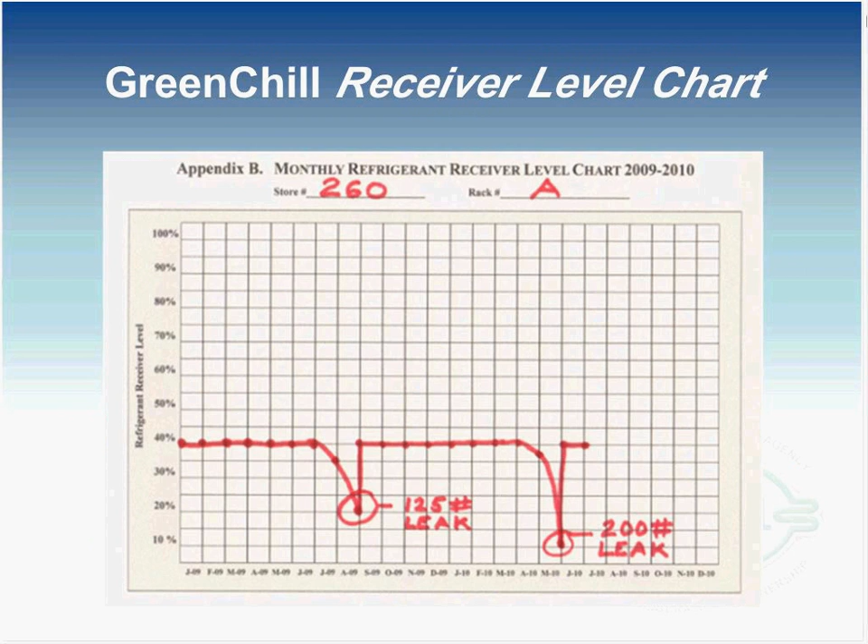Yes. Talking about leak detection systems, we typically use a leak detection sniffer system that has multiple zones, and we would run the sniffer tubing out to the different boxes. My understanding is those will sniff a box, clear it out, then sniff another box, clear it out, and just go around. So it might be a half hour between each box that it's sniffing.